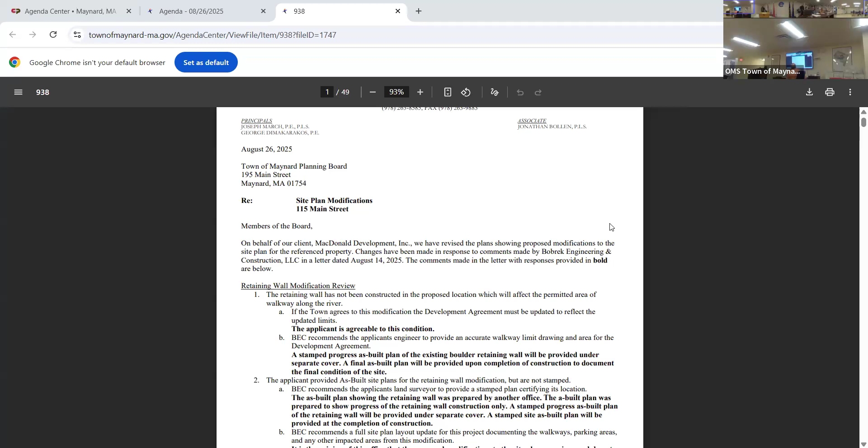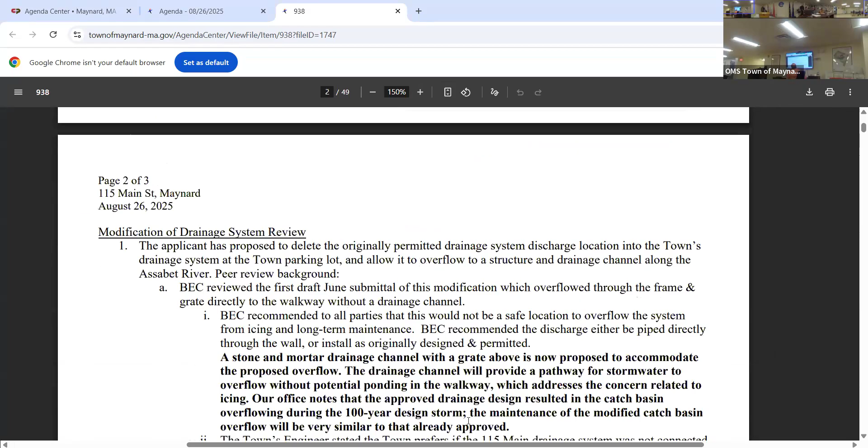Yes, sure, just bring up the letter. Give me a second. Okay. Share this for the audience. John, you've got this, but you probably haven't had a chance to look at it yet. Correct, yeah, I have not reviewed any of this information yet. Okay, can you see that? Can you make it bigger? Yeah, there you go, how's that? And skip down past the retaining wall stuff. There you go, all right. So do you want to lead this, Paul?

We received John's letter. Paul Kirschner, Sanborn Head, here on behalf of the applicants. We received John's letter, went through it, and provided responses to each of the comments. In terms of substantive changes we've made to the proposed modification.

We've replaced the catch basin grate with an ADA grate. We have provided some additional dimensions and elevations in the details for the modified overflow.

So it basically amounts to being more specific in the details about the actual rim elevations proposed, the actual stone and mortar trench elevation proposed, and then the depth had already been identified, but the width of that trench through which the stormwater would flow - that information was added to the overflow details.

That plan has been stamped. We also provided a sketch plan - it was really the same plan we provided previously that identifies the modification areas. We put it on a plan with our title block, and that has been stamped. That was one of the concerns highlighted in John's letter, like who's owning this. We put our stamp all over it, so we feel that we've addressed that.

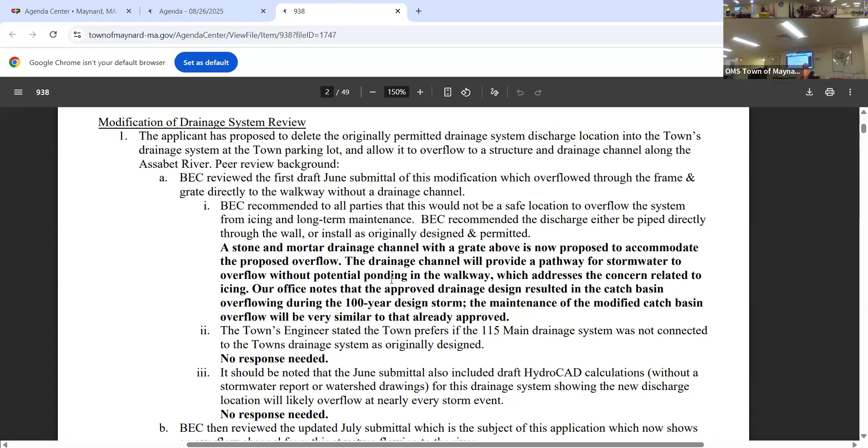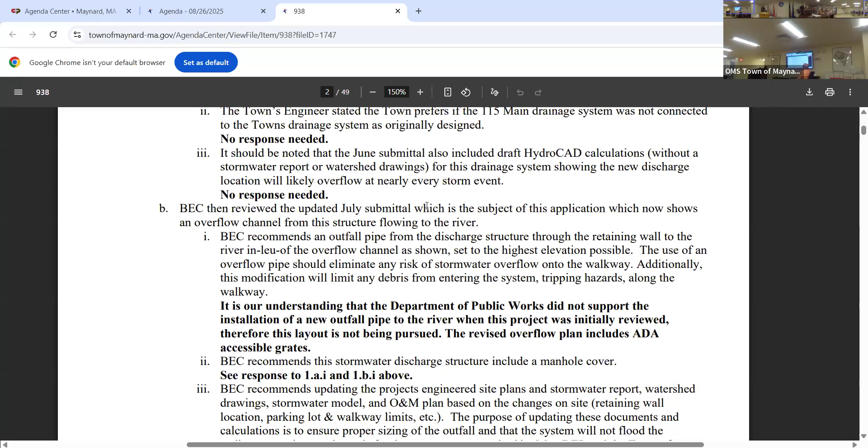Additionally, we did provide calculations. I certainly know that it takes a lot longer than 5 minutes to look through those calcs, so I can go through them if you'd like, but in summary, we modeled it consistent with the detail that we provided. It results in the 2 and 10 year design storms flowing through the stonework weir exclusively. The 100-year storm will bubble up on top of the catch basin grate.

2 inches, and that was actually less than the model submitted with the original stormwater report predicted. So the approved plan did result in the 100-year design storm overflowing via that catch basin. Of course, we're now proposing to use that as our exclusive overflow, but the modifications we've made with the weir, as shown by the calculations, result in actually slightly less water over the top of that grate than what was calculated in the calculations submitted a couple years ago.

So we think that the modification is actually an improvement over the existing conditions. We feel we've addressed the icing concerns. The maintenance is going to be pretty much identical to what was already approved. Of course, you now have this trench that would have to be cleaned when the catch basin is cleaned, but that's really all going to act as one structure, and it's not a big difference in terms of maintenance. So I can go through the comments one by one if you want - that is really the changes that we've made.

All right, thank you.

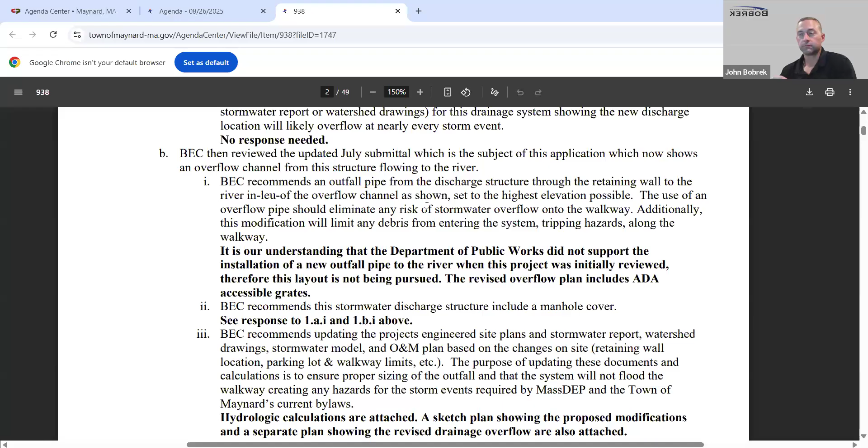Oh. Bill, what do you think?

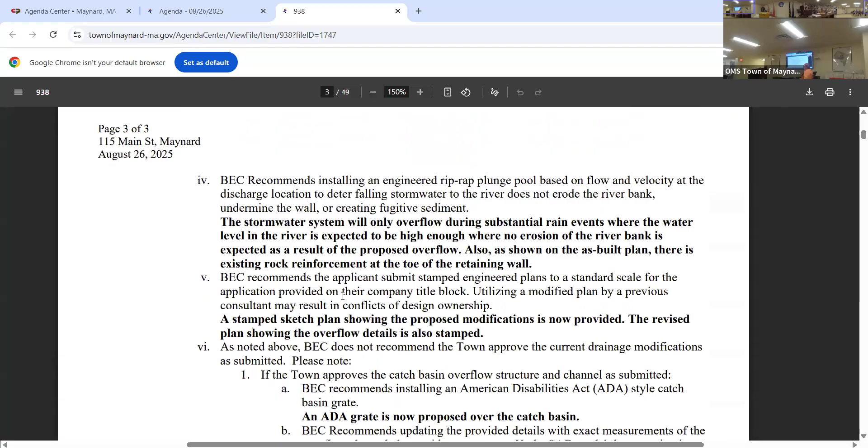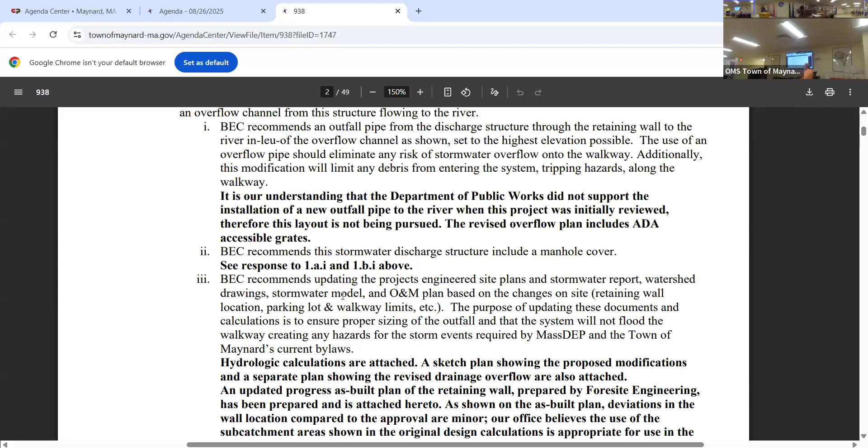I mean, not everybody has had a chance to go over the responses. Should we do it one by one so the board can talk about it? I think that would make the most sense, and it's not that much, so we can get as much work done tonight as we can and keep it moving.

Okay, and if there's something like that, let's see what John has for other stuff that's outstanding, maybe there's some stuff that can just be provided post-meeting or something like that, depending.

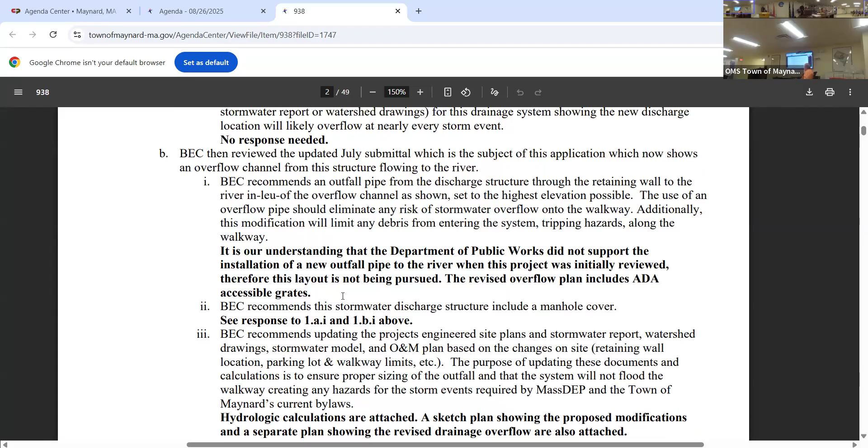Paul, would you be willing to go through the drainage system modification review, just to go through the ones that need a response of some sort?

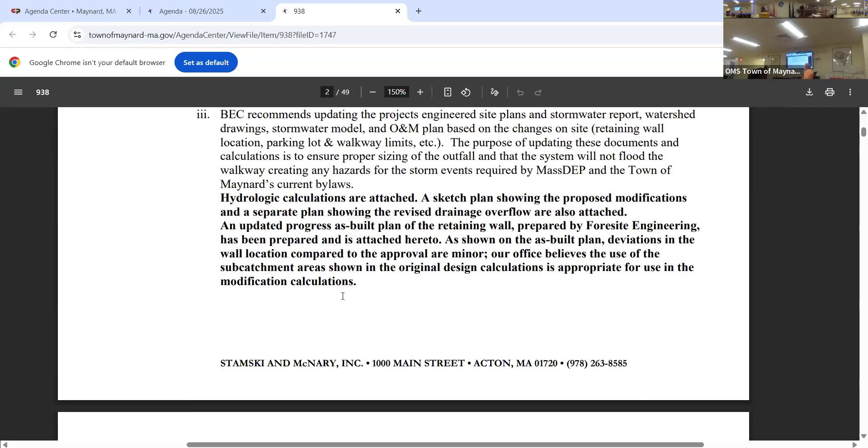Yeah, so can we actually look at one of the plans, I think that you just sent? Yeah, it's in this packet, I think it's gonna be this one. Okay, so just when I reference it later, I think it's helpful to see this.

So we got our title block on it, saying we reference in our notes the plan it was taken from. I mean, of course this is a sketch on the approved plan, we're identifying: keep the electrical box, remove this pipe, modify this in accordance with the stormwater overflow detail.

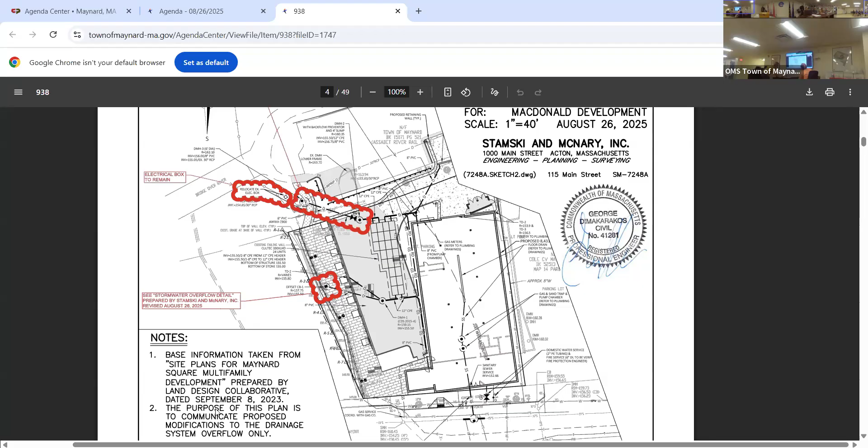And we make clear the point of this plan is only to communicate those changes. So this is the stormwater overflow detail, as I said. We replaced the catch basin grate on this structure with an ADA grate. We specify the model here.

Coming down to this section, so this is your retaining wall on the left, catch basin, the overflow here. Essentially what's gonna happen is stormwater runoff is gonna be able to bubble out through here and then spill into the river. We have a scupper here, so it stays away from the wall.

157.75 is the catch basin elevation that was on the approved plan. This is a 6-inch deep weir here, so 157.25 is the elevation of the actual weir. This is just looking straight on at that overflow: 157.75 on the top, 157.25 of the actual weir elevation, 6 inches tall.

And in order to support that frame, it's actually 1 foot 10 inches, not 2 feet wide, the weir, in order to support that frame.

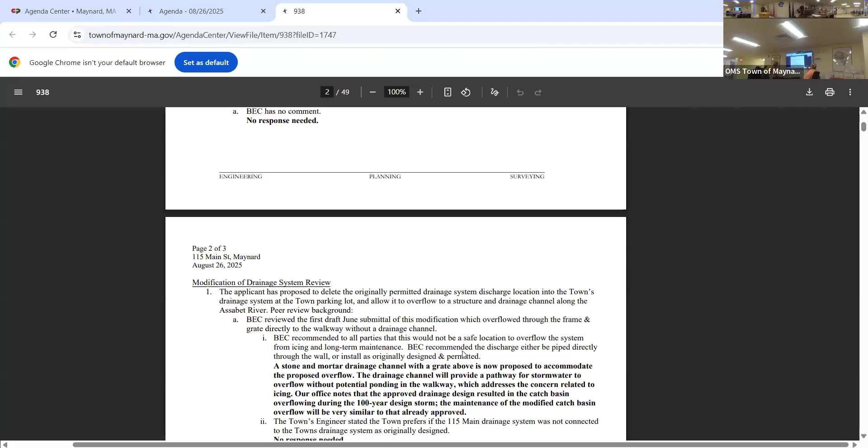So then going back to the comments, I don't have them memorized, so I kind of have to read them in order to talk about them. BEC recommended, all parties, this would not be a safe location for an overflow system, citing long-term maintenance. BEC recommended the discharge either be piped directly through the wall or installed as originally designed.

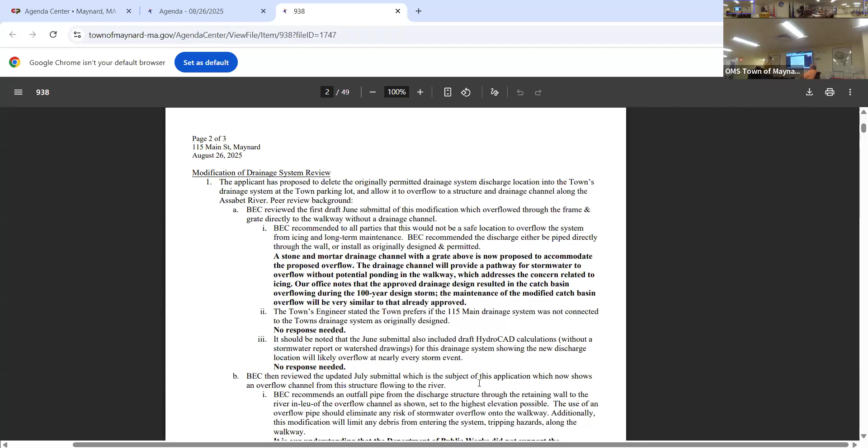We do have a response here. We did provide the grates over the top of it. We're not creating an open pit or anything. The stormwater will have an outlet, so during the 100-year storm event, water will bubble on top of that catch basin, about 2 inches, which is 0.18 feet, as shown in our calculations.

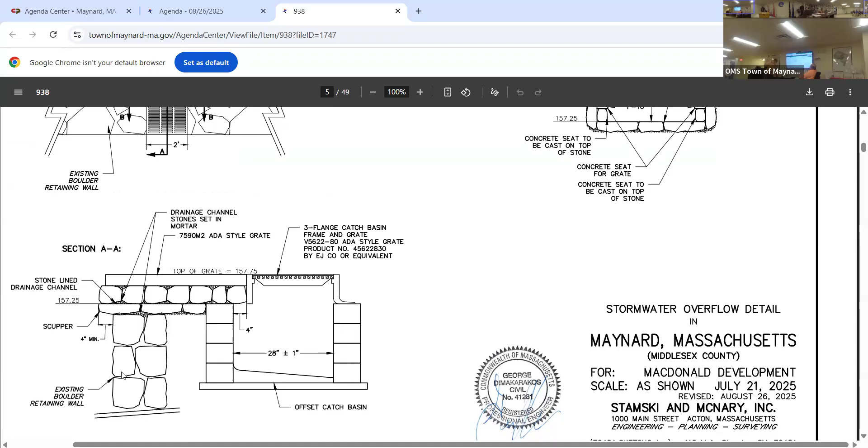That is less than the 0.2 shown in the approved calculations. Realistically, the water bubbles up, but it has a pathway out, it's not gonna get stuck. If we go back to that overflow detail, what that means is it's gonna bubble up through the top here, be 2 inches above the rim of this structure, but it will settle out and overflow here, and that's at the peak of the storm. That's not a prolonged discharge 2 inches above it, that's at the high point. So just to make that clear, I don't think icing is gonna be a problem here. I think the grate addresses that.

Can you zoom in a little? Yes, absolutely.

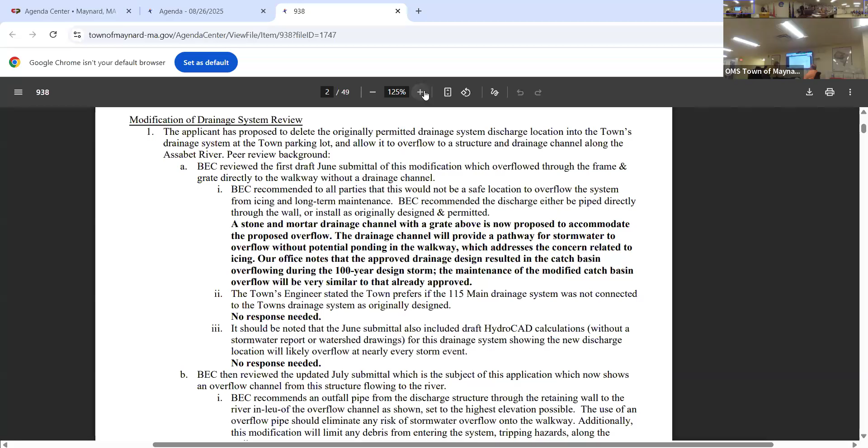Town engineer prefers we don't connect to their system. Our original submittal did include calculations, we didn't provide them. Now we provided them. Straightforward.

BEC recommends we just install a pipe through the wall. Of course, that could be a solution, but I wasn't involved in the initial permitting of this project. My understanding is DPW did not like that. I don't know if you wanna speak to that, just to confirm, but that's what I've been told. They didn't like it, so that's why we're not pursuing that alternative. I did just talk to DPW just now, and...

Wayne didn't recall looking at that particular plan, it was outfall, I don't know. I just asked him that, I wasn't sure. This was, it was Jackie MacDonald, Development.

One of our original meetings, 7 or so years ago, regarding this wall, and where's the water gonna go, what are we gonna do. We had, with our original engineer, proposed several pipes through the wall, and it was just shut down immediately. With our engineer in the room, Wayne was there, it was Justin, it was everybody. So this is why we didn't go that route, and they had reasons, it wasn't that they didn't prefer it. It was for whatever reasons at the time, I don't remember.

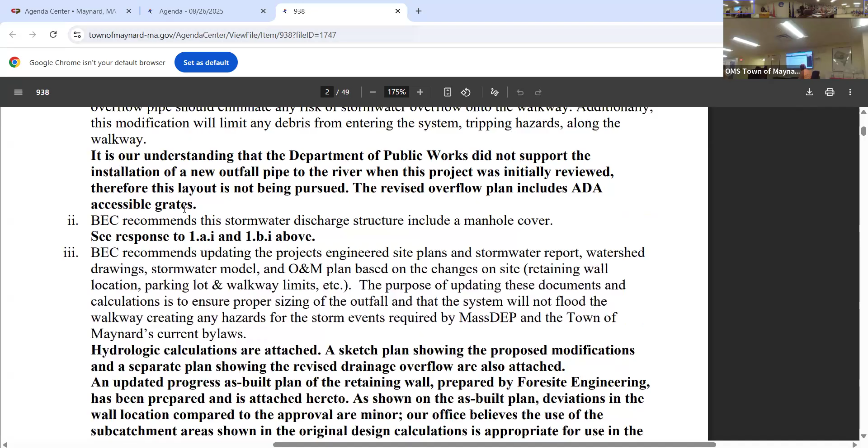Okay, so the next comment. Regarding including a manhole cover on the structure, obviously that conflicts with what we're trying to do here. We can discuss that if you would like, but given our proposal, I don't think we need to spend time on it, pending your decision.

The next comment is about providing a full updated stormwater report, including redefining the subcatchments, and I think part of that comment stems from the retaining wall location. We did submit that plan, which showed it's very close. The difference in the subcatchment area here is going to be extremely small, where it's not really gonna have a tangible impact on the calculations. The calcs that we submitted do show a reduction in runoff rates pre versus post.

Providing additional calculations, recalculating everything, redoing the whole stormwater report, we don't think that it's commensurate with the modification we're proposing. This proposed modification is exclusive to the overflow. I feel it's appropriate to model the overflow only. Our calcs, we did provide all that was provided in the initial stormwater report.

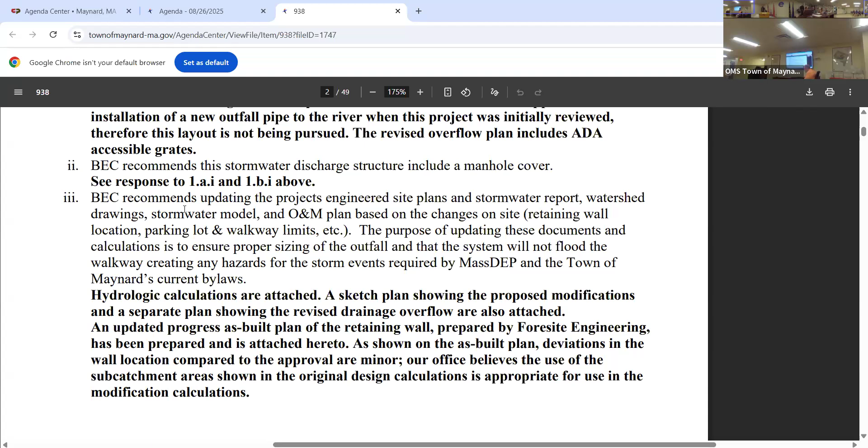We took their subcatchment numbers, inputted it into our software - we use different software than they did, so just to ensure that we're totally transparent about the information I'm providing, we show it all in our software, similar reduction, of course using the same methodology, so you're getting the same results more or less. We just feel that for the modification proposed, the calcs provided are sufficient, and that's really what my response here says.

Riprap at the bottom of the plunge pool here to prevent scour - there is rock there now that was placed as part of the retaining wall construction, some rock reinforcement portion of the bank. This is only gonna overflow when it's raining.

The 2-year storm event is the lowest storm event that you've analyzed, but that is over 3 inches of rain, so not insignificant, the river's going to be running. At that point, I don't think scour of the riverbank is gonna be a real issue here. It's gonna be full of water, so it's not gonna have a place to scour.

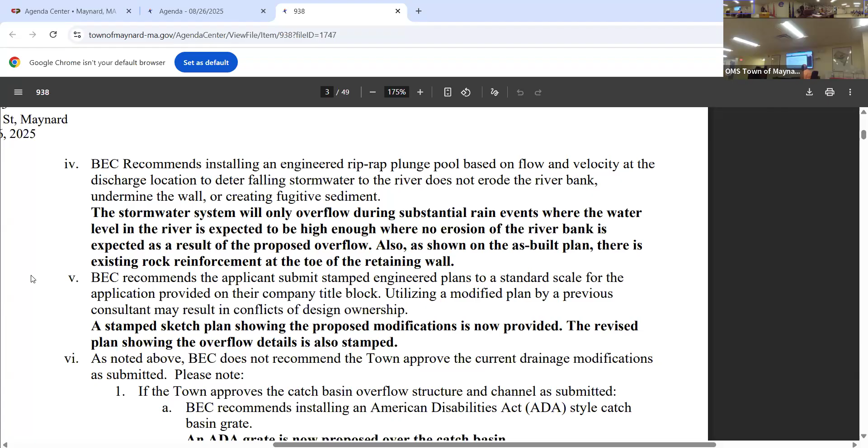We stamped the sketch plan and provided that other stamped plan that I showed you which identifies the modifications. Next comment, we added an ADA grate - this is the point in the letter where John says, if you're gonna approve this, at least do this. So we added an ADA grate, and we provided calculations. I go into some detail, as I said, 2 inches above the grate, and that is our story.

Okay, thank you. Are there any comments from the board?

I do have concerns with the weird design instead of a standard outflow pipe through the wall. I understand where you're coming from, but this was decided long before I was here. I don't know, Bill, if it's possible to figure out why that decision was made. I don't necessarily want to go against something where there was a consensus against a design 7 years ago, and why the applicant went a different direction. But I see infrastructure like this often, and I'm thinking about what water does going down walls.

I don't like the design.

Is this open still, or are you guys- Yes, you can reply. Okay.

If that was an option, we would not have connected to the town's overflow. This would not have gone this path to connect to the town's overflow. So just so it's not like they had a conversation one time- that is why the design was made the way it was, because we couldn't go through our wall. So this whole thing that's happening, although it's less than ideal, it is better than connecting to the town's system, and DPW agree that's not ideal for anybody. So this is the option based on all the information we have. That's why, of course it's not ideal, but it's going to work.

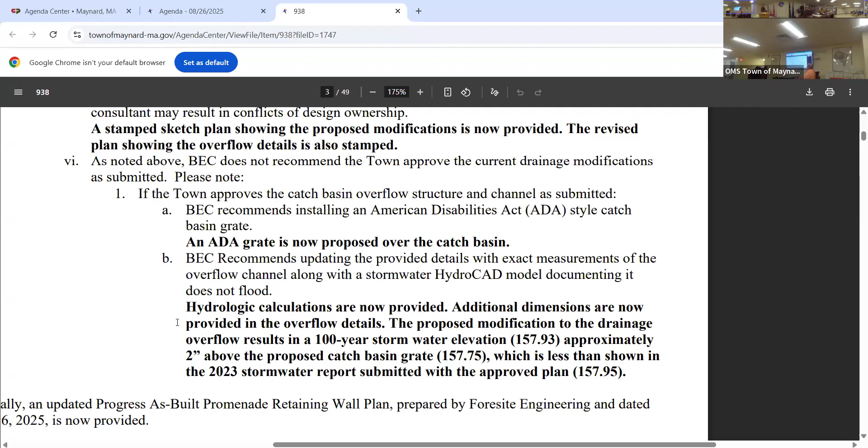You're muted. Oh, there you go. Yep, I got you. I understand the context now. I wasn't aware this had come up and they were pushed in the direction of connecting into the town system. I do know the town engineer prefers not to connect into the town system, and that has MS4 implications. It has backflow implications, like McDonald had stated, and I do agree with that. I do like having the outfall at this location.

My only concern is it's just not a typical outlet structure. You can achieve, if this was a piped system like I had recommended, you still can achieve an elevated outlet structure. The original outlet was 155.05. They're currently proposing 157.75, so you're gaining 1.5 feet or so. If this was a pipe right under the surface, you could probably gain 1 foot. So you are gaining elevation in the outlet, and the likelihood of surcharging backwards is much lower than the town's pipe connection that was originally permitted. So I do agree that this is a better solution in this location.

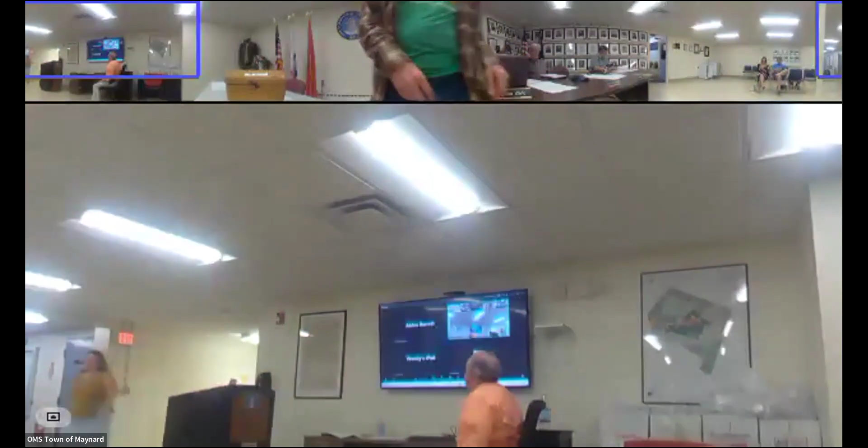Okay, yeah, no, thank you. Jackie, you want to stand across from that? Oh, it's good, thank you, good? Yeah, I appreciate it, thank you.

All right, next on the agenda, we have two items. I need to open them, well, we opened, they're both open. But we couldn't, we discussed the planning, Powder Mill overlay district, but we didn't have a chance to discuss the map. So, whatever's the board's pleasure.

Tonight, I think with two folks attending, want to address the Powder Mill, my neighbor too, Abby, who's online. Well, we've got a working couple tonight, so she may be in and out. Oh, there she is, hi.

Hi, I don't have a comment now. I was hoping to listen in for a little bit and then I might. Great, yeah, absolutely. So we have two items. One is the text, and one is the map. Do you mind if I--

Not yet, not in a second, okay, we have to reopen the hearing. Can I do them both? Can I open them both, or you wanna do them one at a time? We should do one at a time. Okay, I'm going to reopen the hearing on the Powder Mill overlay district, not the map -- we're gonna talk about the text first, so that's agenda item 4: creating zoning regulations for PMOD subdistricts D, E, and F.

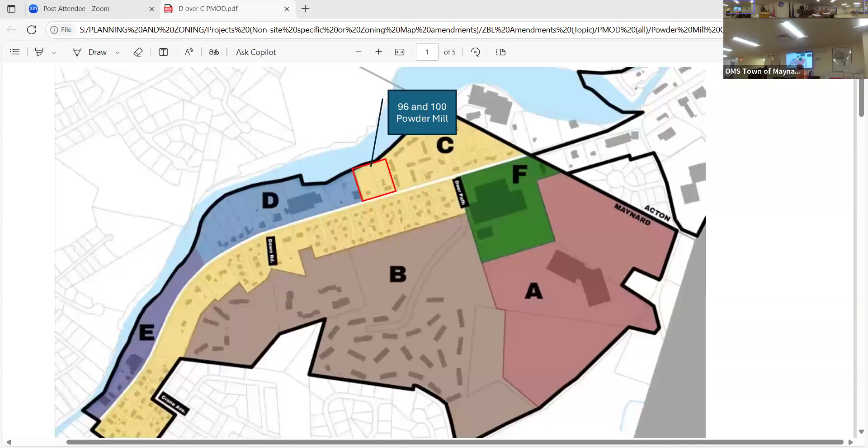All right, seems to make sense. Am I going to be given an opportunity to ask a question on a specific house after this? Is it in one of these? It's not in, it's in C. Unfortunately not tonight, but we'd be happy to talk to you offline about specifics. Okay, we just haven't even delved into C yet, but yeah, somebody told me the house had sold, so I wasn't sure, and someone else told me the town of Maynard may have bought it, so I'm wondering who it belongs to now. We don't know anything about that. No, okay.

So this one, after you close public hearing, what we're doing is you recommend, it would be a vote whether to recommend changes to the town zoning map. And your recommendation to town meeting is, but this is the town zoning map, okay.

I'll make a motion to close the public hearing. Seconded by Mark. All in favor, please raise your hand. Or nothing. Good.

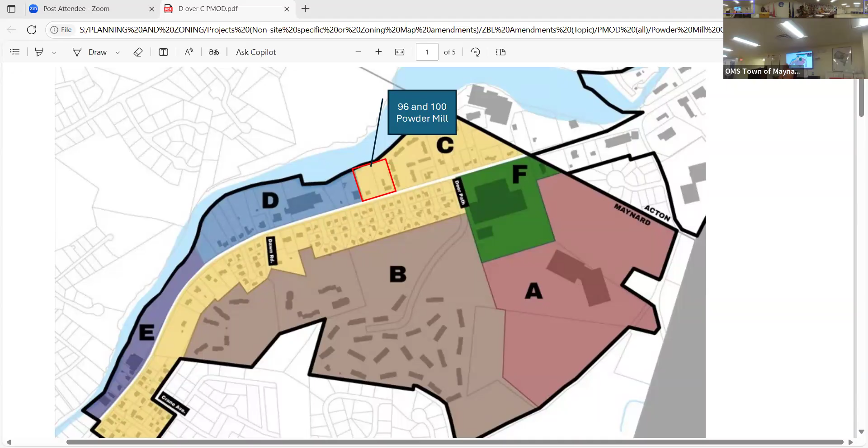All right, so we're back on schedule now for the second and fourth. Jeff is out the next one too, he thinks, so I'm here, just be on deck. I told you, we get right up. Hey, shut it down. Enjoy that.